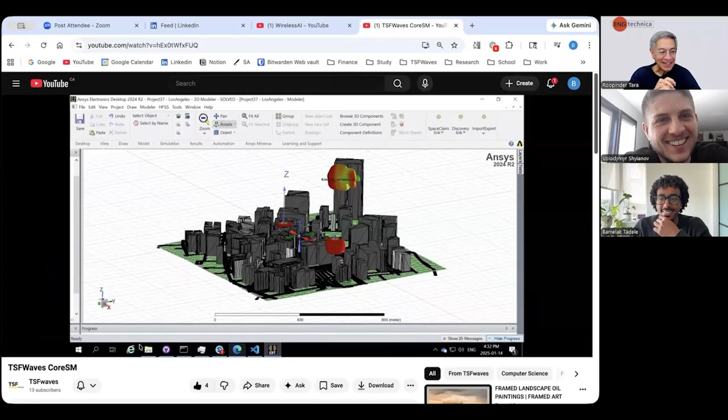I had somebody on the show talk about HFSS, and I didn't understand a word of what he was saying. And if people talk about Python, again, honestly, I think you've got good stuff. This is niche here, complicated for engineers. If you could supply engineers who need it with both things, HFSS, am I saying that right? HFSS and Python, I think you've got a valuable product and service.

So what you have to understand is these guys are very smart, and they have very good expertise in information theory and the things that they do. But specifically with this chatbot that we're developing with Gustavo's team, you can really export that domain of knowledge with that bot helping you out. And so you can focus on the things you need to focus on, and at the same time have all the hardware tools at your disposal.

But okay, so I can go through the entire video. It's only 2 minutes long, just kind of describing, and then I'll show you where our workflow comes in. Do you think this is enough time, or I can just go to the specific workflow? Oh, no, that's fine. Let's do it that way. Okay. Sounds good.

You have my audio, right? You guys can see this? Yeah, I can see your screen. I think it's Los Angeles, right?

Yeah, it's Los Angeles. I have to ask you, where are you guys from? I have to ask everybody because I'm not from the US. I'm Ethiopian. I'm fully Ethiopian, but I was raised in Winnipeg. I came to Winnipeg when I was like 6 years old and just grew up there. Okay, all right. And I'm Volodymyr, from Ukraine. Oh, Ukraine. Okay, all right. Both interesting places.

I came to America when I was 7, so we have that in common. And Volodymyr, what about you? You came from Ukraine probably recently when the war started, right? No, in 2014, when the war started the first time. First time the war started. Okay. Still have relatives there? My grandparents, yeah. The rest of the family's in Canada.

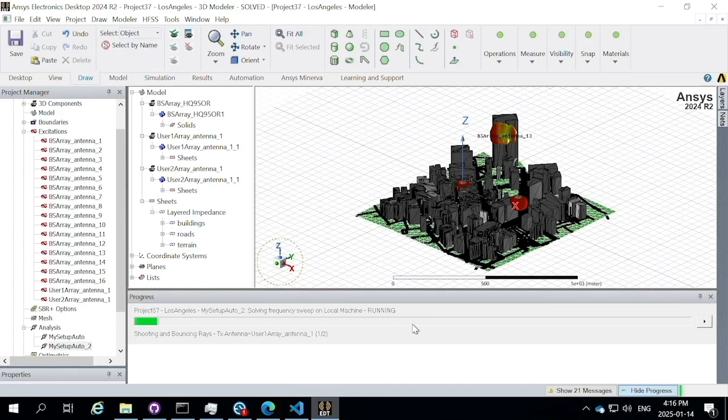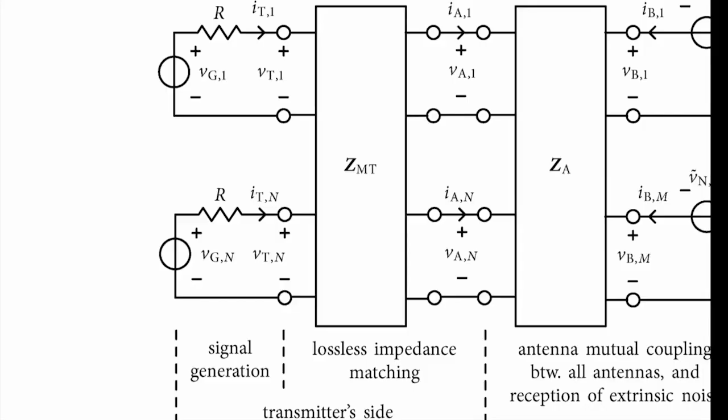TSF Waves Core SM is an advanced Python API designed to integrate seamlessly with ANSYS Electronics Desktop. In doing so, it provides system-level analysis and key wireless performance indicators using ANSYS's world-class simulation tools. These tools include ANSYS HFSS for antenna design, ANSYS Circuit for designs of amplifiers, filters, and matching networks, and ANSYS SBR Plus for simulating in complex propagation environments. Using multi-port communication theory, we integrate the various hardware components in the wireless chain for assessment in different wireless networks and setups. Such setups include single and multi-user networks, single and multi-antenna systems, and both orthogonal and non-orthogonal resource allocation schemes.

Under these setups, we provide system-level wireless key performance indicators to assess the impact of hardware designs on the overall system. These include information theoretic metrics such as the channel capacity, block error rate, the number of useful signal streams for transmission, and many more. We offer a variety of established workflows that customers can personalize and build upon, along with many others currently in development. We collaborate closely with our customers to create tailored designs and test their devices in a wireless configuration of their choice. Join us as we advance the next generation of wireless design.

Yeah, so I just want to quickly go to different parts of that video that give an overall outline. So as you can see, this is off of Python, and you can see that we have a bunch of different workflows. So maybe you want the stadium example, right? So maybe we have something for a stadium, the way users would be distributed, the different resource allocation scheme that they'd have. And so this is where we set up the network settings, and you can see this is different PyAEDT code to run the hardware stuff on HFSS to get the placement, which city you're working in, which kind of arena, which kind of antennas you use.

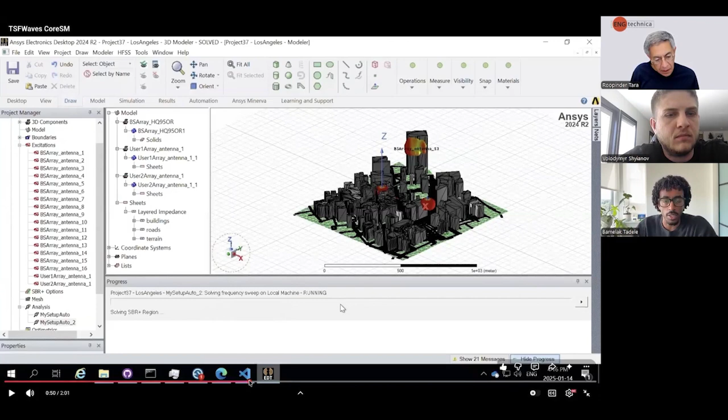And so basically what would happen is you run this code and then it would start building it. So this is a city example where we have one base station antenna with 2 users here. And as you press play, this thing is automatically doing it on its own and just starting to solve everything. And then after it's done, so this is just a different part of the video. After it's done, it will set all of it, solve it, and then we will pop out the different metrics

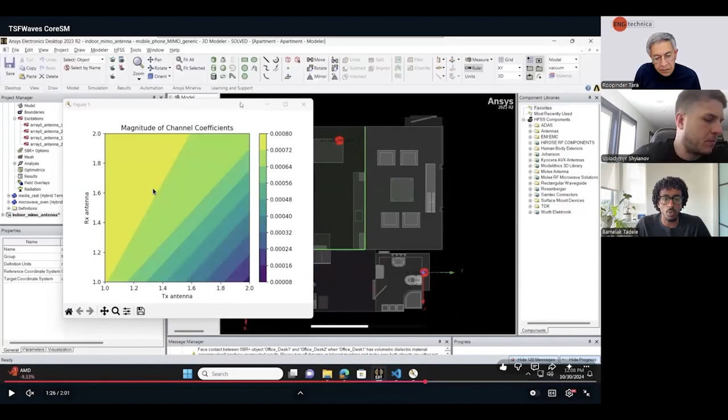you look for. So these metrics are based off information theory, but they've taken everything, like all the simulated antennas, all the simulated hardware into account. And then this is the kind of stuff where you can assess, okay, is my antenna, how many data streams can I send out? How many singular values can I have? Things like that, which would be relevant for your design. So as you can see, just a bunch of plots pop up. So that's more or less high level, I think, some of the things we do.

And now the thing with Gustavo, his team at Divergence AI, we've basically taken these workflows, which are just Python based, and now we've added an agentic tool with it. I have a question though. So are you going to assure me I don't have to learn Python? I could use the agentic? Yeah, Gustavo's tool, I think that's going to be easy. And then, like in this video, you're going to see that learning Python is not actually required anymore, which has actually been something that we wanted to fix.

And then Gustavo came along, and we were actually so happy because he saw the opportunity to go into the wireless market, because the wireless market is maybe more than half of the HFSS market. And what we saw is an opportunity to really not make engineers install Python and run anything that's gonna make their head spin. And I just look at this video, I think it's really a great collaboration for us.

Okay, let's roll. And sorry, just one thing to add to that is, like I've said this before, but it's really like the wireless guys that work on this stuff, they do not have this domain knowledge of hardware design. So this agentic tool, you take all the work of Python and using HFSS, and then you can export it to using this. I could use a natural language interface, right? English. Okay. Exactly. This is just importing the city that you want. This is all a design that we made.

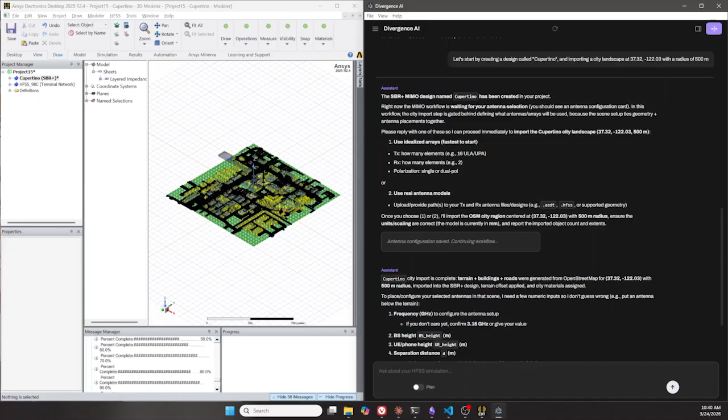Your antennas get placed. You still have to be an electrical engineer though, right? You can't be a dummy like me trying to design antenna systems, right? Not yet, at least. I think maybe we will achieve this at some point. The problem with all of this is that there's just too many different ways you can do things, right? Because it's design. Anything you design, if it's a building or a plane or a bridge or antenna, there are always so many different permutations that I think those kinds of things can never get automated 100%. Sure. This wireless AI is the tool we've built with Gustavo.